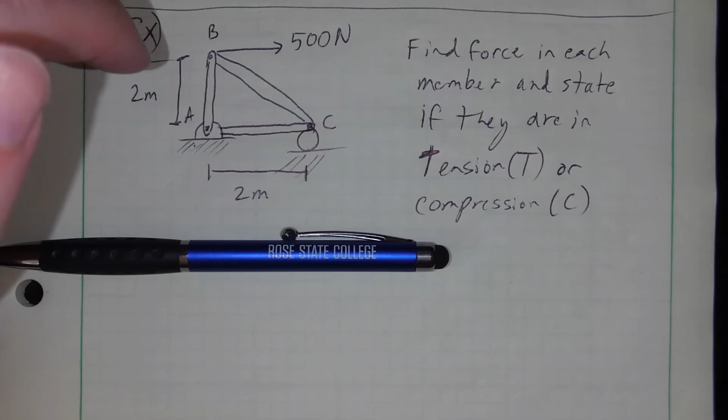It's a very simple truss example that we can start with here. This is a truss because all of the forces—I've got forces applied at the reactions here, A and C—but those are applied at the endpoints. I've got a force applied here at the endpoints, so all of these members only have forces applied at their endpoints. Therefore, we can treat each one of these as attached by a smooth pin, and therefore two force members.

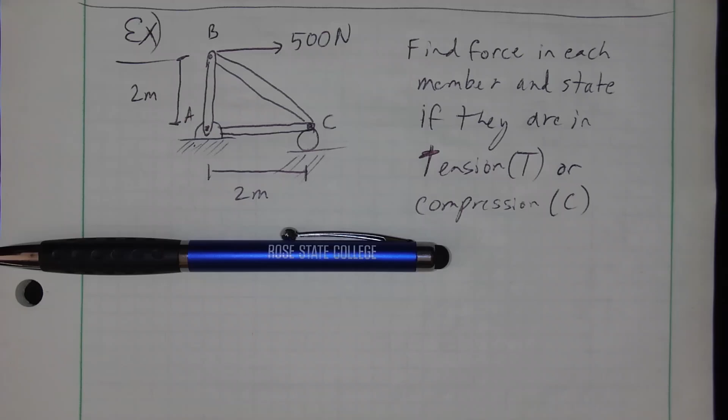Each one of these is going to be a two force member, either in tension or compression, and that's what the problem is asking for. Whenever a problem says find the force in each member, it's normally a really good candidate for what we said, the method of joints. And so we're going to apply that here.

Now the method of joints, if you go back and look at it, we just mentioned that. Step one, solve for reactions if possible. So let's do that.

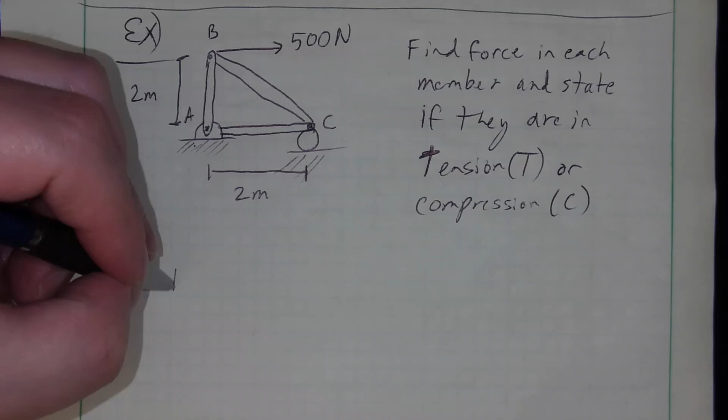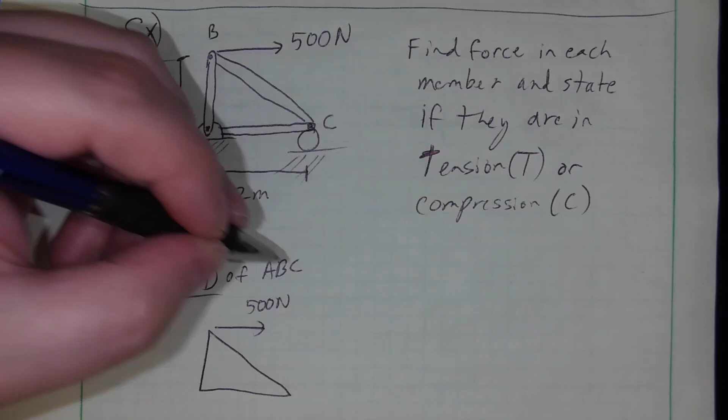Free body diagram of the entire thing. We're just going to draw a simple frame of it. It doesn't have to be detailed. Apply forces to that. Free body diagram of A, B, C, the entire thing. So just draw a rough diagram of A, B, and C. Apply forces to it. I've got this applied force, 500 newtons at the top. I've got a pin down here.

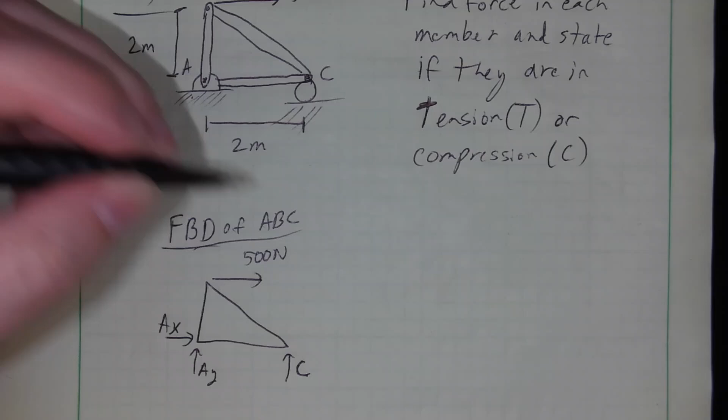So right now it's just a chapter 5 problem. I've got a pin down here, so it's going to have AX and AY applied to it. You can say, hey Steve, wouldn't you draw that in the negative direction? Yeah, you could. I wouldn't argue with you if you did. I've got a roller on a horizontal surface, so that's going to apply a vertical normal C. And the distances required for the moment equation are going to be 2 meters vertically and 2 meters horizontally.

And we should be able to solve that free body diagram now. So again, at this point it's just a chapter 5 problem. Sum of forces in the x direction, set that equal to 0. That's going to be AX plus 500 newtons. I'm going to pause and solve this. So go ahead and pause and find those reactions and then come back.

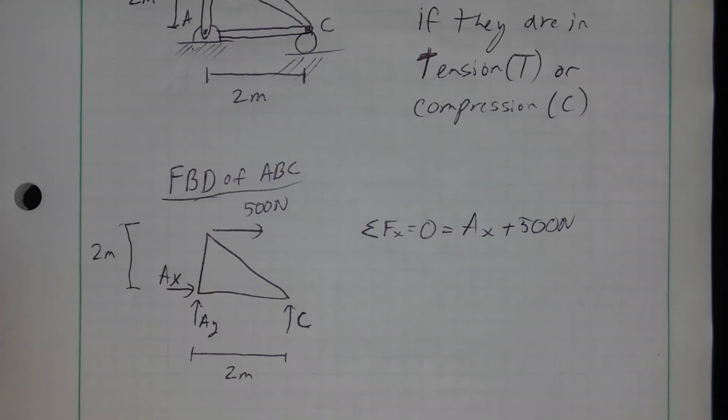Okay, so you need to be able to do that, and you want to be able to do it pretty quickly. There's a reason I've been harping on you guys about draw your free body diagrams, set up your equilibrium equations. Can you solve? If you can, solve them. If not, draw your next free body diagram. That is exactly what we're going to do the rest of the course, and that is exactly what we're doing here.

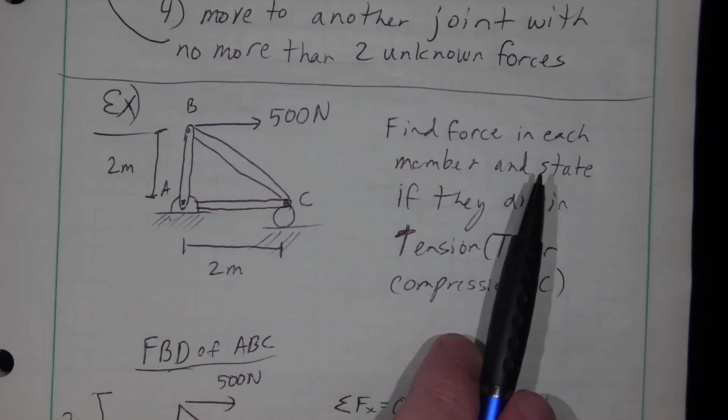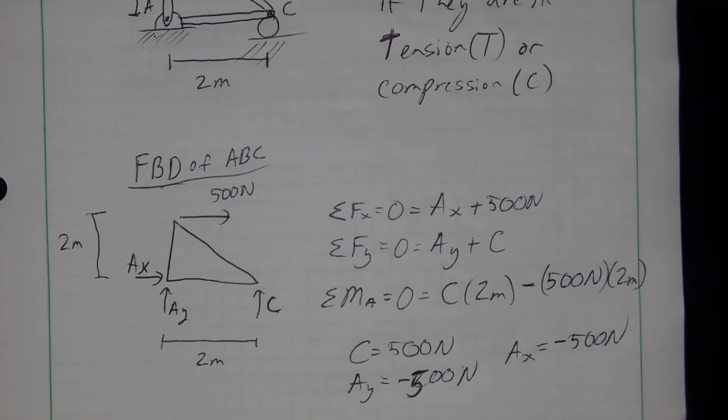Notice, this doesn't even get us to our answer. We want to know the force in each of these things. None of these are this, but we need to find these in order to find these. So this is a step. And if you're like, Steve, well, I don't want to do all these steps to find stuff I don't even need—well, that's how a lot of this works.

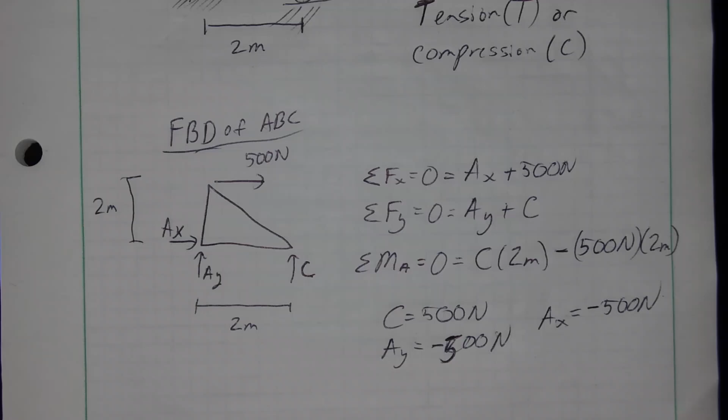I think I mentioned when I introduced this to you guys, you go through this process, and if you can solve, then you solve. And you don't complain about the algebra, you don't complain about how hard it was, you don't complain about how much work it is to get there. This is engineering. There are plenty of other majors where you don't have to do a whole bunch of stuff to get to an answer. But this is what we do.

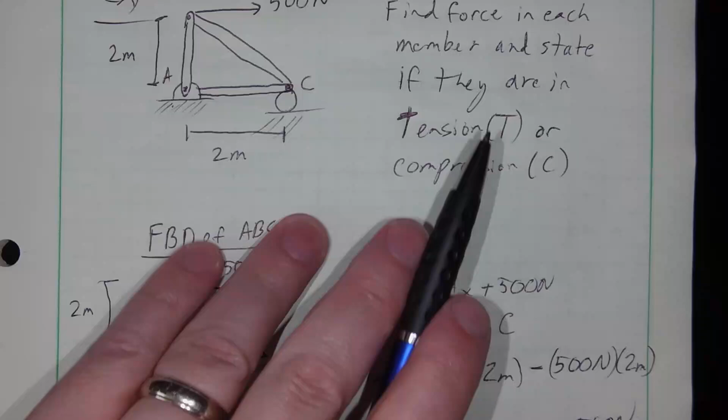So we've got some things that we need. It's not what is required. Let's go get what's required. So again, if we go back and look at method of joints, solve for reactions if possible. Okay, done that. We were able to find the reactions.

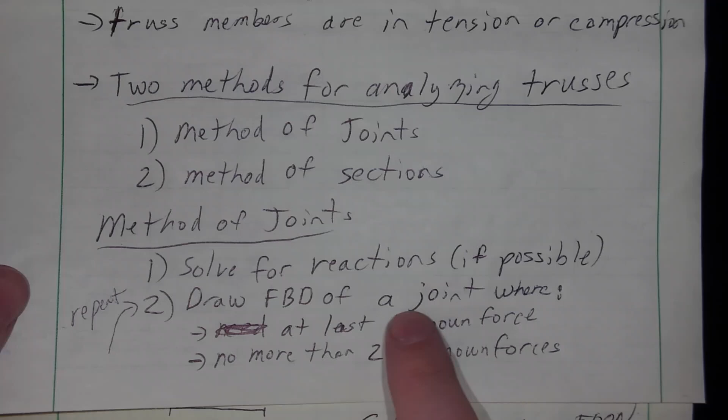Draw a free body diagram of a single joint where we have at least one known force and no more than 2 unknown forces. So if I look, I've got 3 joints I can pick from: 1, 2, 3. All 3 of them—right now I've got AX and AY at this point, and then I've got a force in AB and I've got a force in AC. So there's 2 unknown forces in these members here.

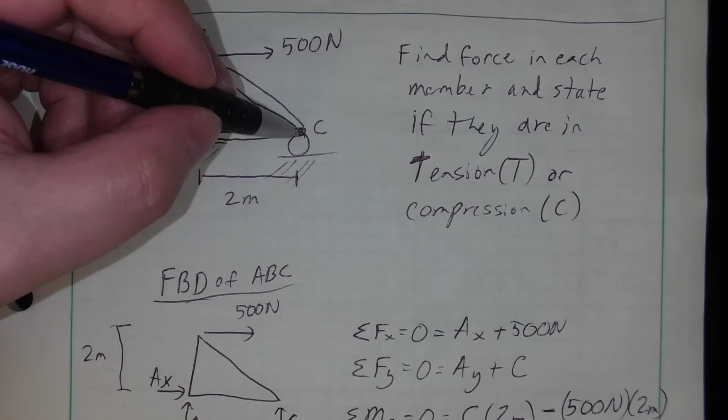But I do know all the reactions here, so I have at least 1 known and at least 2 and no more than 2 unknown. Same thing at any one of these. Every one of these joints—at this joint I've got the unknown reaction, I've got the known reaction, I have 2 unknown forces in these 2. And here I've got a known applied force and 2 unknown forces in those members.

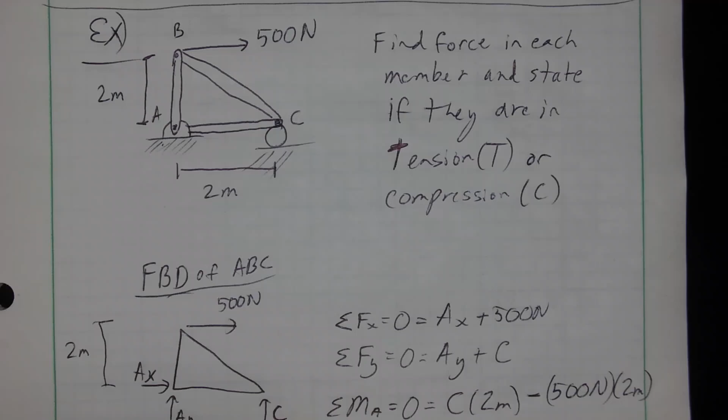So I could draw a free body diagram of any joint you like and solve it. I'm just going to go in order because it doesn't appear that any of them are going to be easier than the others. So I'm just going to draw a free body diagram of point A.

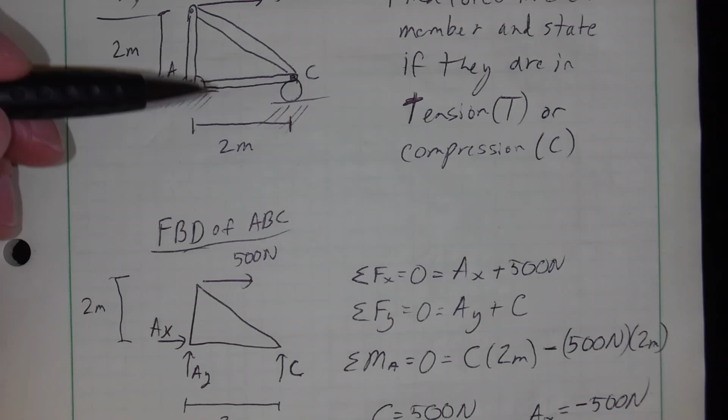Now this is a free body diagram of a single point, a particle if you will. So I'm not going to be able to write a moment equation with a joint. I'm only going to be able to draw all the forces that are acting on it.

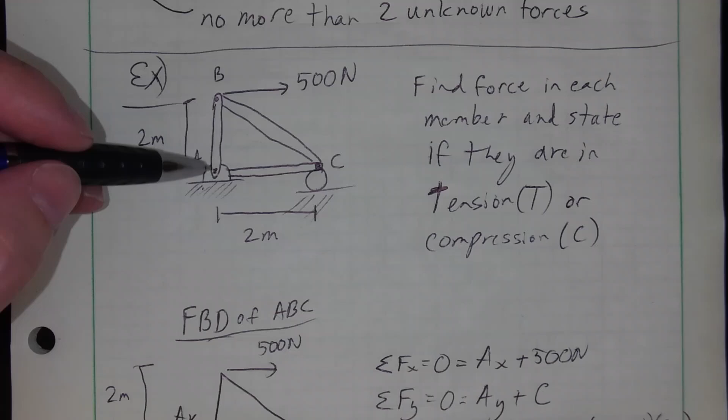So what's acting at point A? Well, I've got a pin here, and I've just found that pin has AX and AY acting on it, and they're both acting in the negative direction. So I've got 500 newtons acting in the negative X direction.

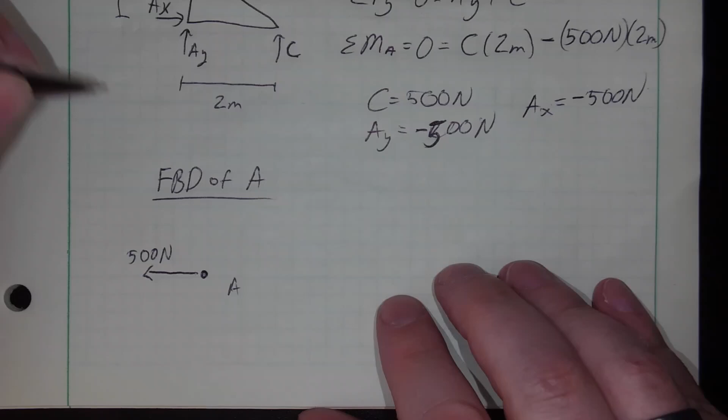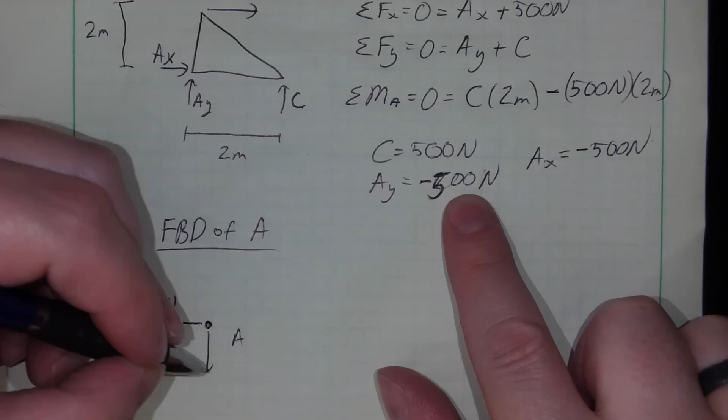Steve, why are you drawing it like that? Well, remember, I drew it positive here. I found it to be negative there. So I'm going to apply it in the negative X direction here. Same thing with AY. I drew it positive here. I found it to be negative, 500 newtons. So I'm going to draw it in the negative Y direction there.

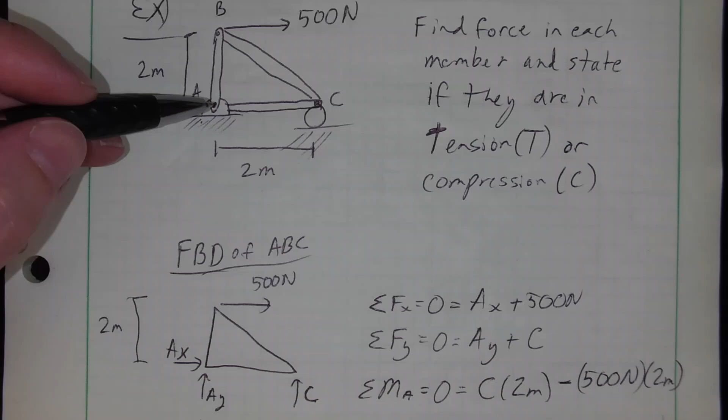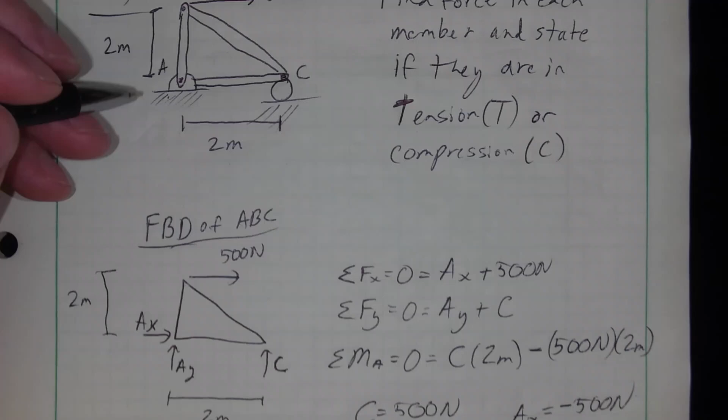And then what else do I have applied at point A? Applied at point A, I've got force in this member AB here. And this member is vertical. It's drawn vertically, so I'm going to draw a vertical force, and I'm just going to call it AB. And the same thing, I've got the force in this member here. From A to C, it is horizontal, so I'm going to draw a horizontal force AC.

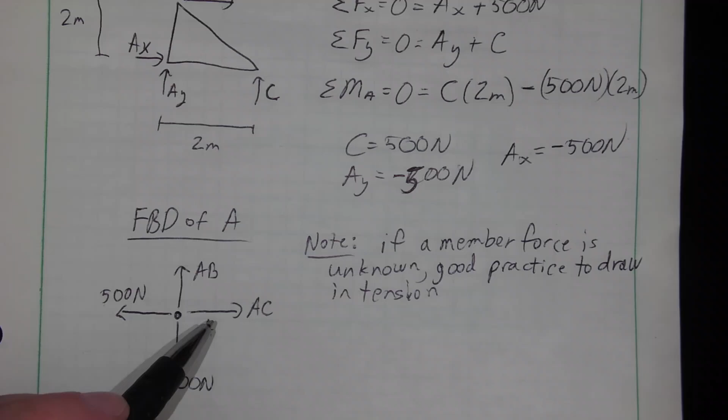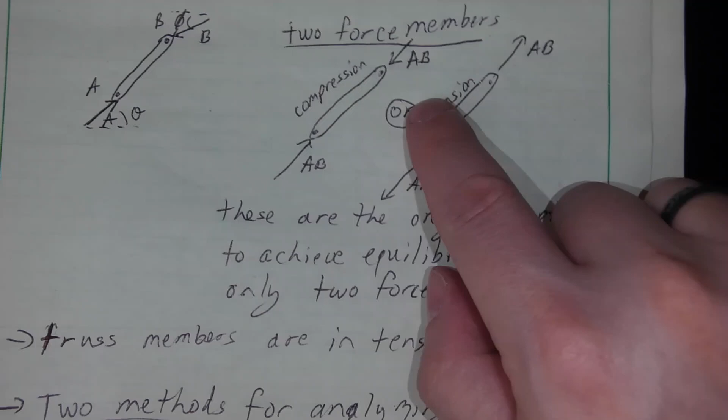Note, if a member force is unknown, good practice to draw it in tension. If I get a negative sign, tells me it's compression. I've drawn these two members as pulling forces. Tension is where it's pulling, so I've drawn these in tension. I'm going to solve for the unknowns, and if I find them to have negative values, which I don't think I will in this one, but if I find negative values, that just tells me that they are not actually in tension, they're not pulling. If I get a negative value, it just tells me that, well, it's actually in compression, so it's actually pushing.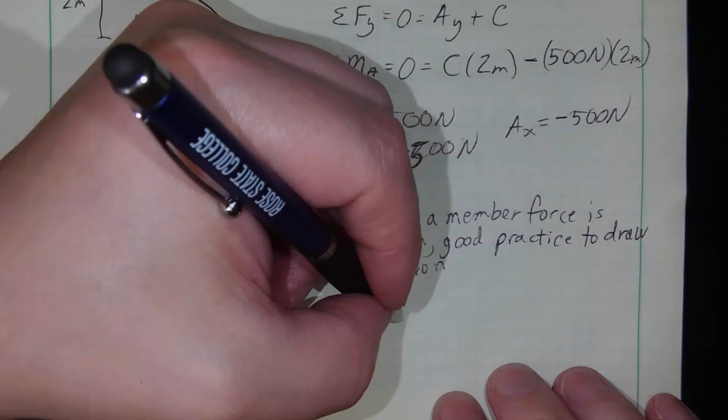So let's, this one's going to be pretty simple, looks like. Sum of forces in the X direction, all the forces in the X direction, well, I've got, that's going to equal 0. I've got AC in the positive X direction. In the negative X direction, I've got 500 newtons. I set that equal to 0. That can solve that. Same thing in the Y direction.

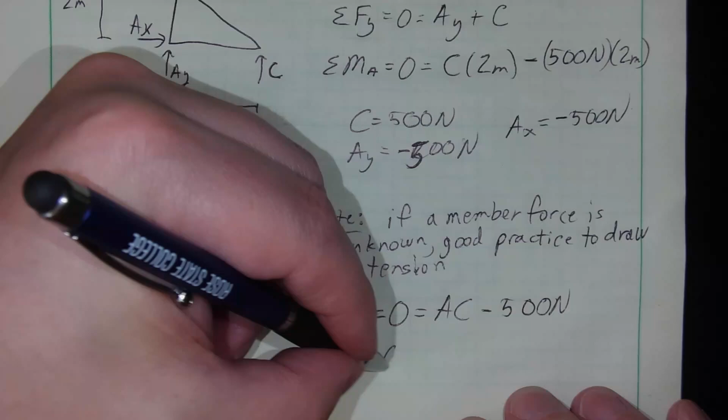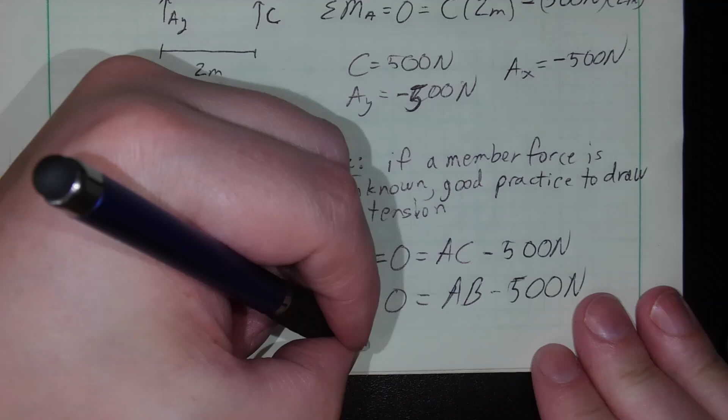Sum of forces in the Y direction equal to 0. I've got AB going up, and I've got minus 500 newtons from the pin going down. So you can solve these. I don't even have to pause and let you solve it. Feel free to pause if you need to. I'm trying to talk and write at the same time, which is not always good.

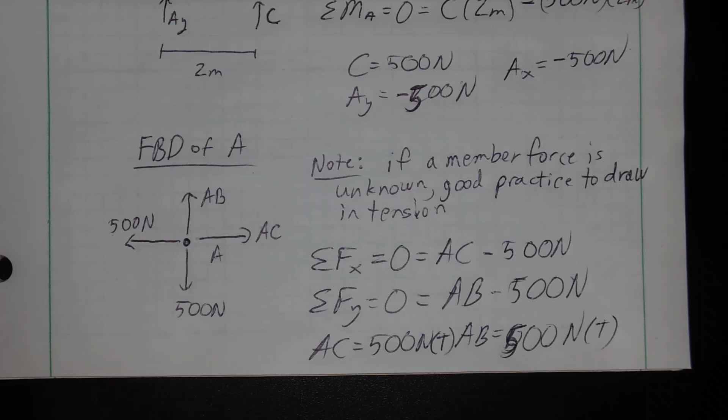No shame, get these right. So we've got both AC and AB are 500 newtons. It's good practice to put next to it, is it in tension or is it in compression? So if you put a T next to it, that tells us it's in tension. If you put a C next to it, it's in compression. If you don't put anything, that means we got to go back to the drawing, which is not good.

This way, these are reportable results. Right, so we can box these in if you like. Underline them, make them easy for the reader to find.

Okay, now remember this guy I keep pointing back to and say, remember the process. What are you looking for? So what did the problem ask for? The problem asked us to find the force in each member. I've got 3 members, AB, AC, and BC. I want to find the force in all 3 of them and state whether they're in tension or compression. So step 1 is, what are you looking for?

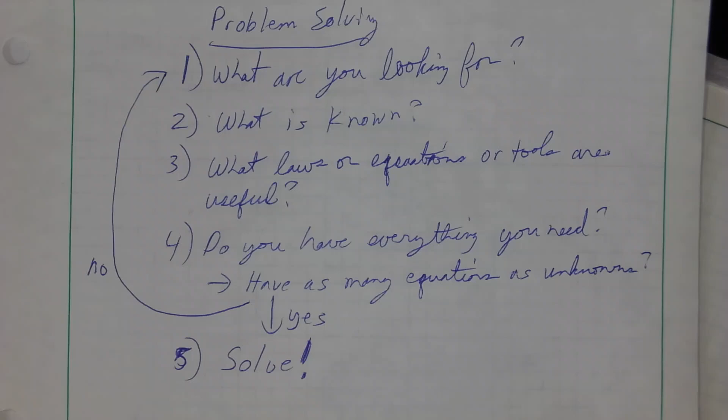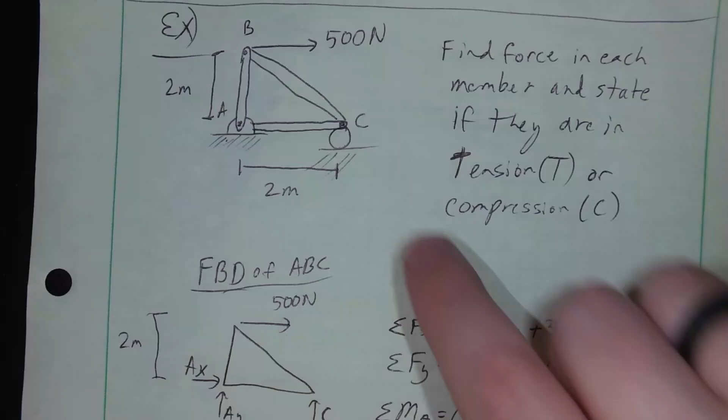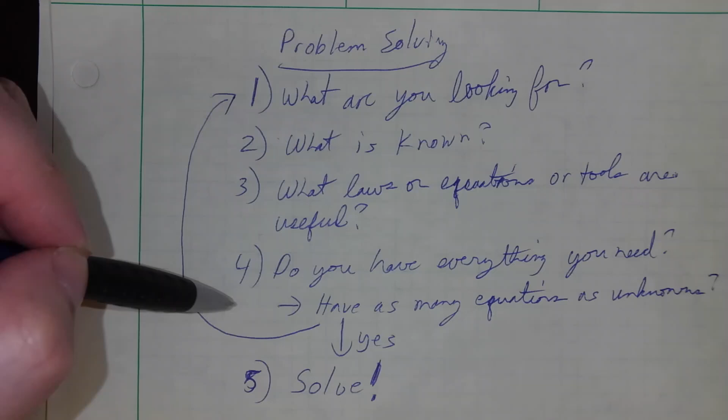Okay, I've not found everything I'm looking for. I've found AC and AB. I found 2 of the 3 things I'm looking for. What I'm looking for is BC. Right? So what I did, well, I went through, I found what was known, what laws, tools are useful. I needed to find the reactions, so I found the reactions first. Did I have everything I needed after I found the reactions? No, so I go back. What was I looking for?

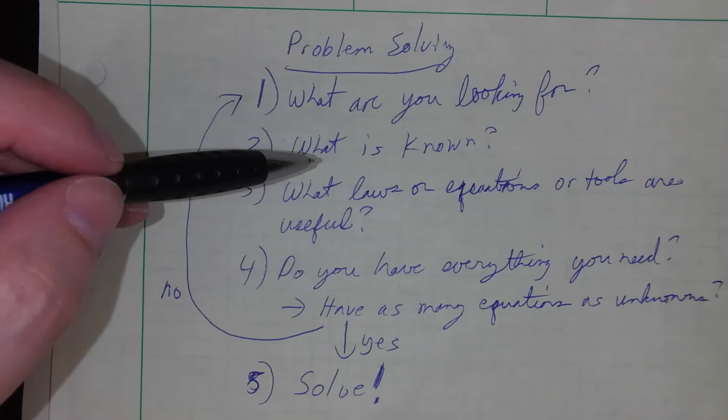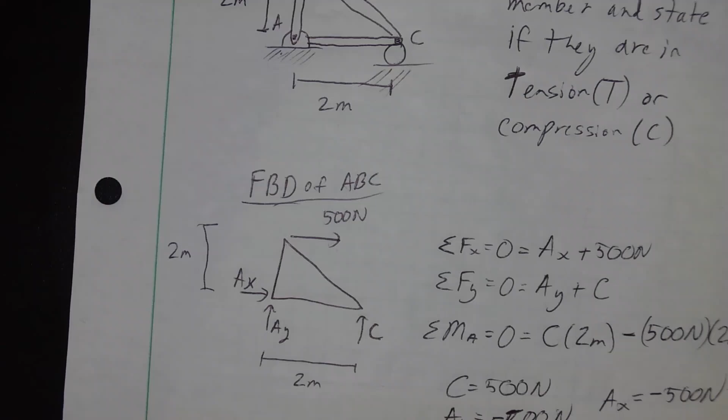Well, I need those member forces. So, okay, well, what is known? If I go to joint A, then I can write equations at joint A. Does that give me everything I need? No, I still need BC. Okay, what are you looking for? Well, I'm looking for BC. Okay, well, what do I know about BC? Well, I need to either go now to a joint that's attached to BC. So I can either go to joint B or I can go to joint C. Dealer's choice, you can go to one or the other. They're about the same mathematically, looks like.

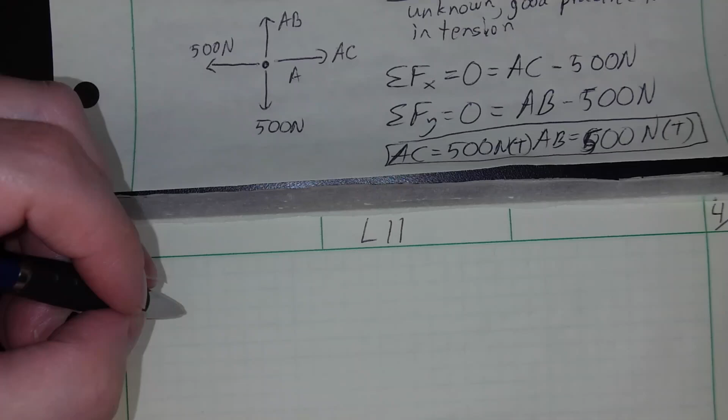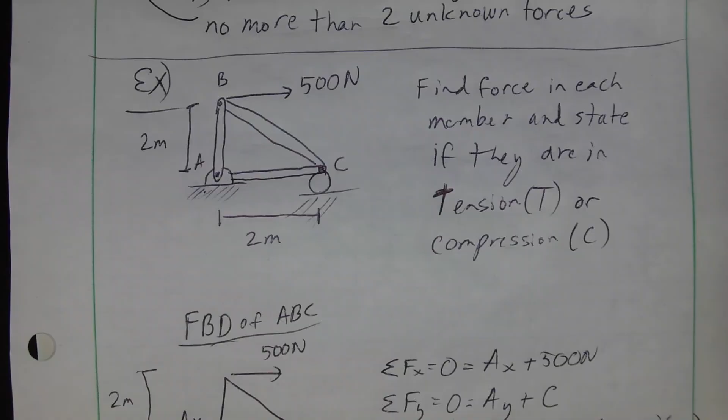I'm going to go to, this is lecture 11, page 4 of something. I'm going to draw a free body diagram of joint B. Go look at our original diagram. B has member AB, member BC, and the 500 newtons attached to it. So joint B.

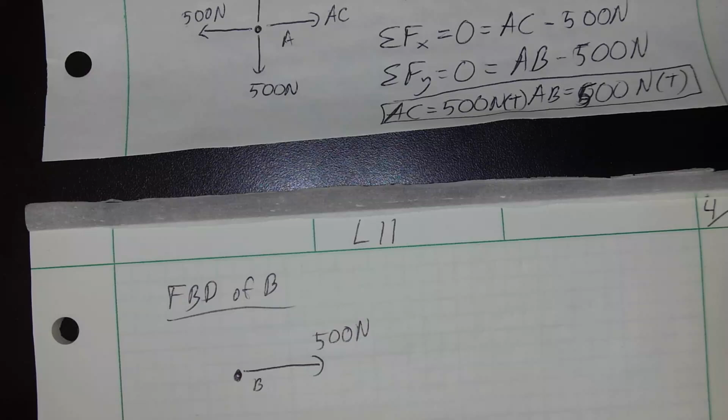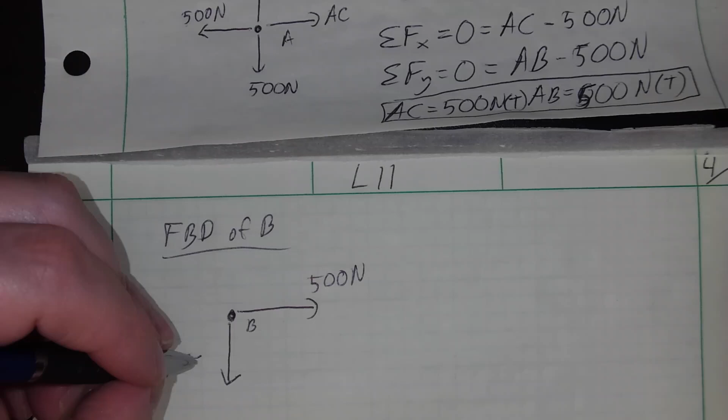I have 500 newtons applied out here at the very top. You can draw it here as AB if you like, or you could just call it 500 newtons, in tension, as I've drawn it. You can either label it AB and then go back and say AB was 500 newtons in tension, that's what I plug into my equations, or just call it 500 newtons. Either way's fine, it's your diagram, put it however you like. And then I've got BC.

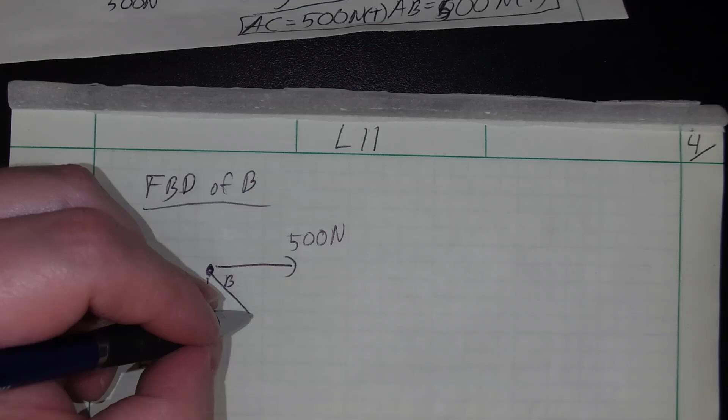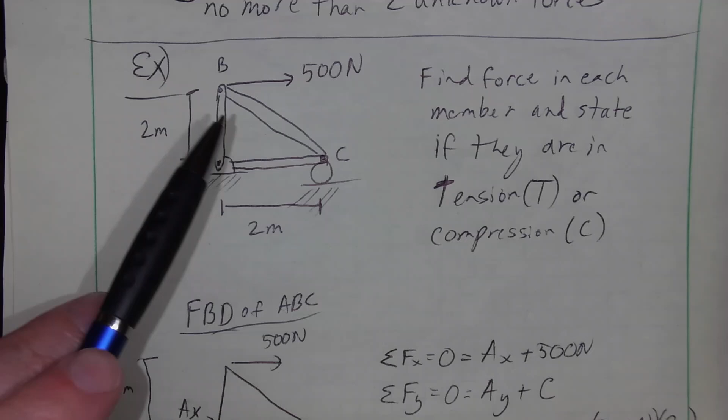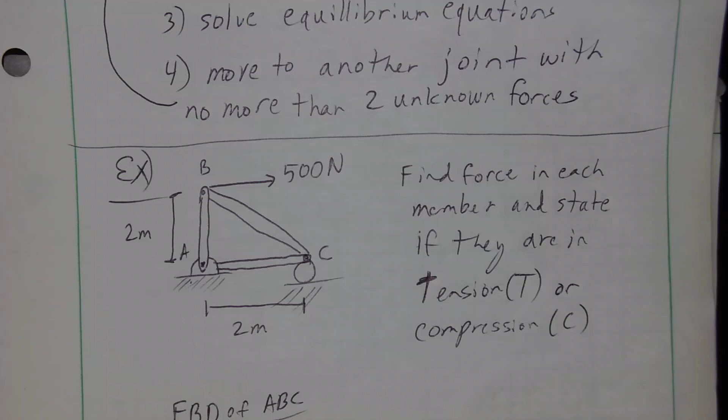Now we need to know the direction of BC. They didn't give me an angle, but I know some trig, and trig tells me this is a 45-degree angle. If you're not sure, pause it and figure out how we find this angle. So if we're good that this is a 45-degree angle, again, what do we need to know? I need to know this angle, and basic trigonometry functions find that angle to be 45 degrees. So I have a 45-degree angle here. Do I have everything I need?

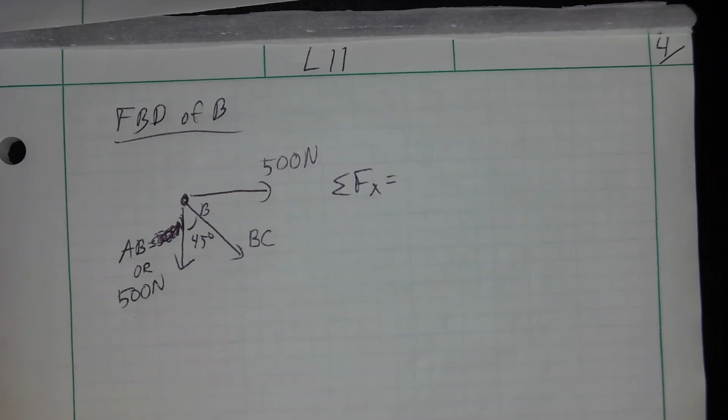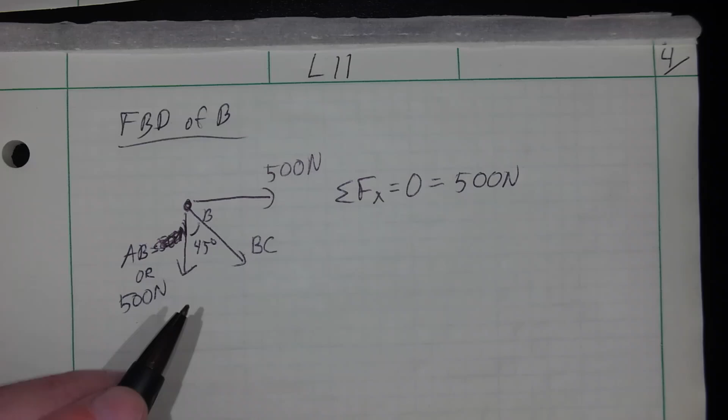Well, I don't know, let's write equilibrium equations. Sum of forces in the x direction: I have 500 newtons, and again I don't know BC, so I've drawn it in tension, pulling on the joint. Part of BC is in the x direction, so the x component is opposite that 45 degrees, and I've drawn it in the positive x direction, so I'm adding it. That's an equation with one unknown, I can solve for that.

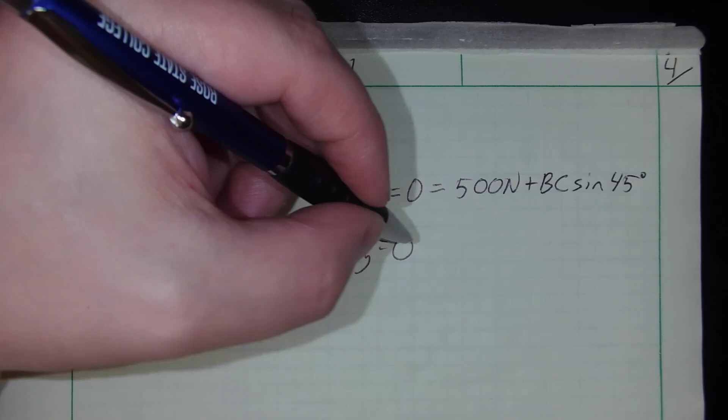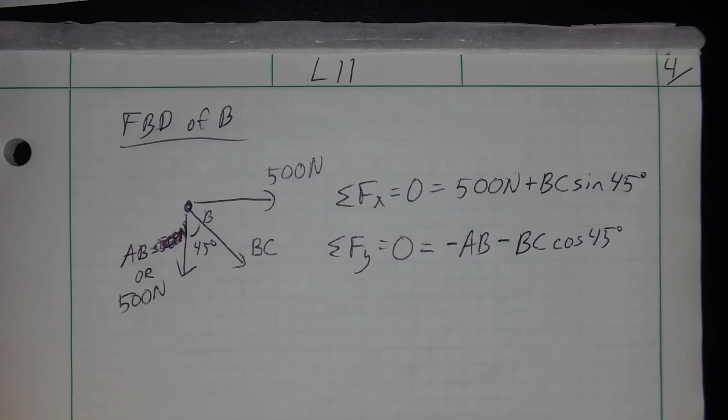Sum of forces in the y direction equal to zero is equal to minus AB, and then minus BC, and this one, as I've drawn it, is cosine 45 degrees. Remember, you can write AB or write 500 newtons in there, but either way right now it's pointed in the negative y direction. Pause it and come back and give me values. Okay, you get it? I've got minus 707.1 newtons.

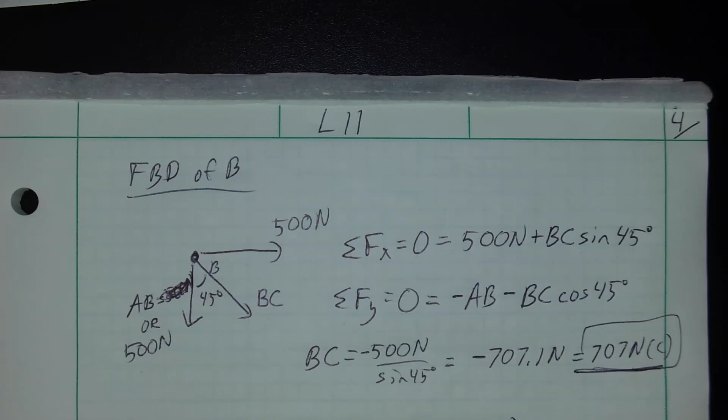Now there's a few ways you can do this. You could say that is 707 newtons in compression, and underline or box that in. That's okay. What would be really good for me, for you, and for anybody viewing this, is to now collect all of the answers, because there's going to be problems with more than just 3 members. So at the very bottom, or maybe the very top, after you've collected all your answers and done all your calculations, make yourself an answer block. Put all the forces, state whether they're in tension or compression, collect them all together, and it makes it real easy for both of us when you're going back to study this or when I'm grading it.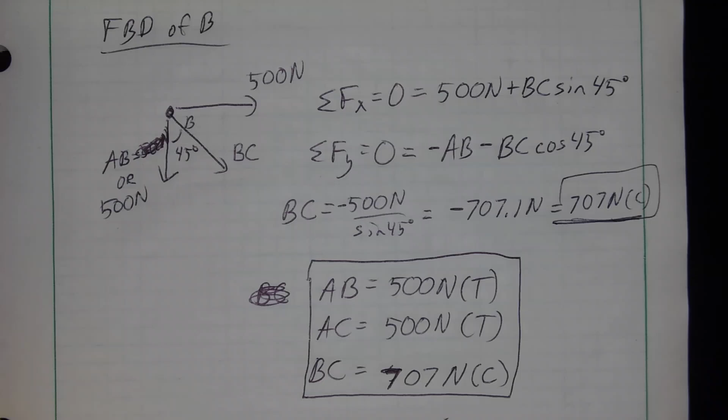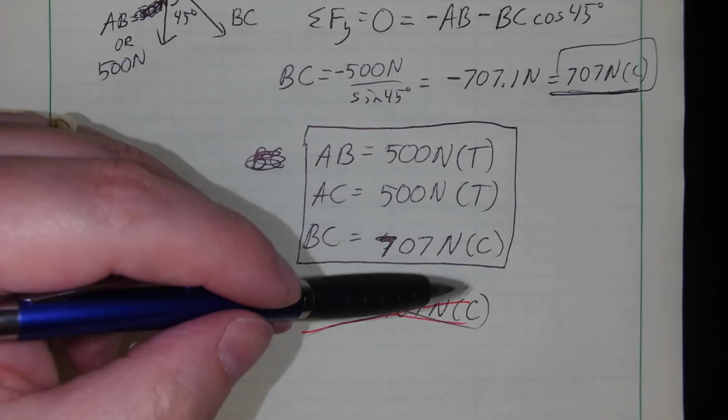And then write all of them through. Do not give me minus 707 newtons in compression. That is wrong, you're saying that's 707 newtons in tension for BC, which is not correct. It is 707 newtons in compression. So do not call it minus 707 compression, don't say minus 500 in tension or minus 500 compression. No, if you're giving me T or C, you do not need the negative sign. That's what the T or C is telling me, the direction, and that's really what we need to know. That's what the problem's asking for: find the force in each member, state if they're in tension or compression.

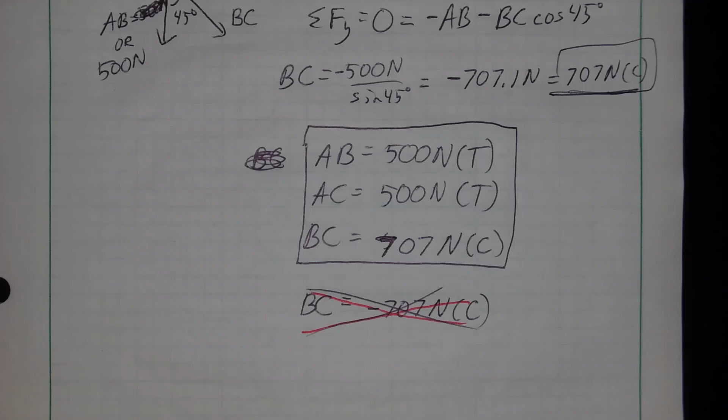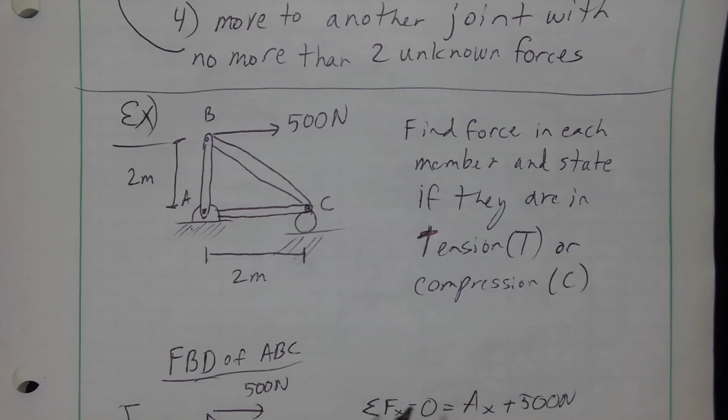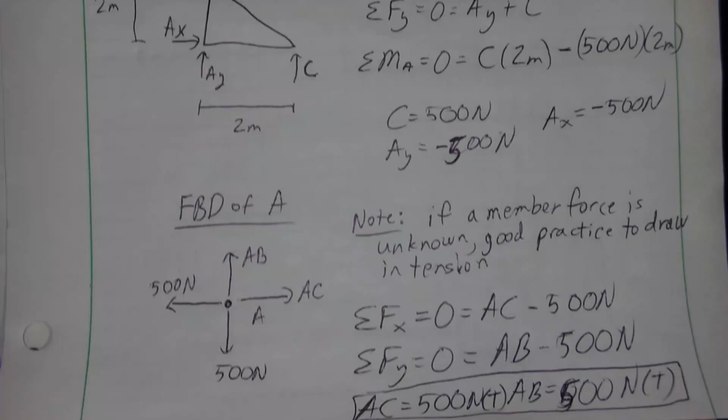So this is a nice, uniform way to present that information. Notice how I've set this up, we talked about this the first day. Draw your problem, a rough diagram from the problem, mention what you're looking for. I've given a lot of detail here, you could write a little shorter if you like. And then very clearly show how you've gone through the process of finding how those solutions break out, in a nice, clear, methodical progression.

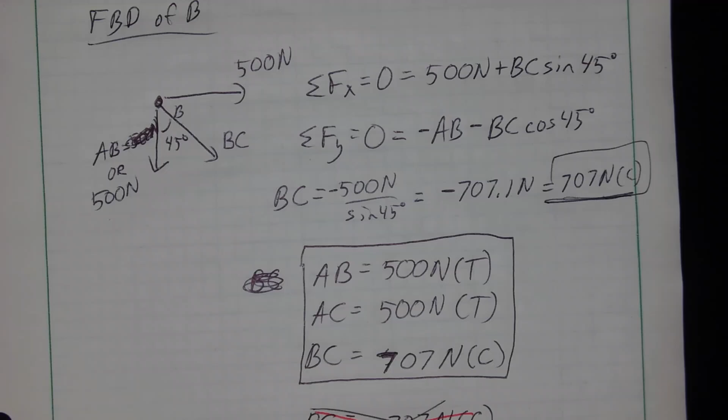As you guys have seen, I'm going to grade your homework. If you're just copying it straight out of a solutions manual, with no thought to how it's structured to progress, I'm hoping you guys are starting to figure out that doesn't help you for the exams. You're welcome to do it, it makes my grading easy. But this also makes my grading easy, and it's going to make your studying for the exams easy, and actually prepared for the exam. So when you get a problem and have no idea how to do it without a solutions manual, that makes my grading easy too. It's not going to make your grade easy, but it makes my grading easy. Anyway, hopefully that helps, we'll pick up and move on from there.